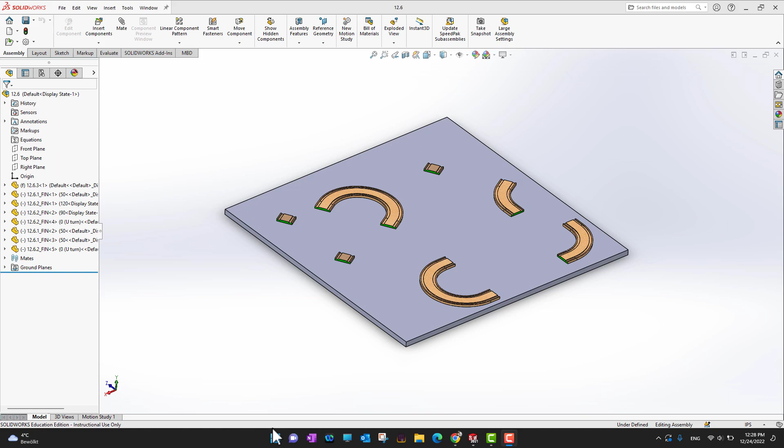But before using the magnetic mates, you need to establish a magnetic connection between the parts which you are using in SolidWorks. We'll cover that in the next video using asset publisher, where we can establish a connection. But in this video we are just going to use the magnetic mate.

Right now, as you can see, I have an assembly. What I can do is hold a component, and when I hold a part or component, you can see there are dozens of pink dots available on different components. These are the magnetic connections or available connections.

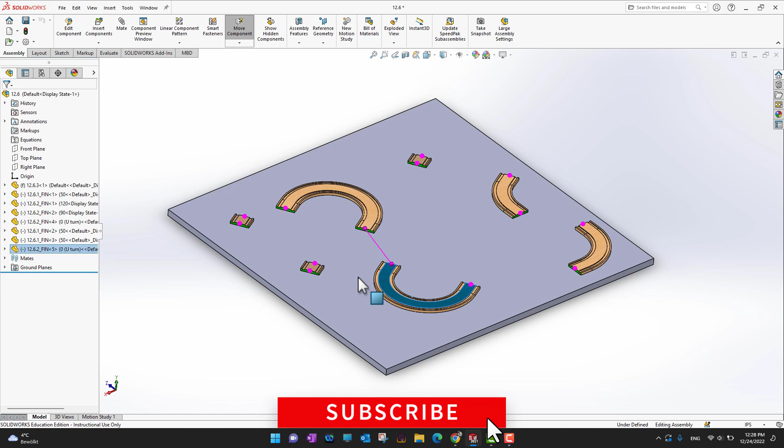When I bring it close to any of these parts, you can see there would be a line established there, which means these dots are ready to connect. If I let go of my drag, it's going to automatically connect to that part, as you can see here.

Or if I just drag this, as you can see there is another option, again it's going to establish a line and they are ready to connect. And what if I drag this and bring it here, and then I want to make a connection here.

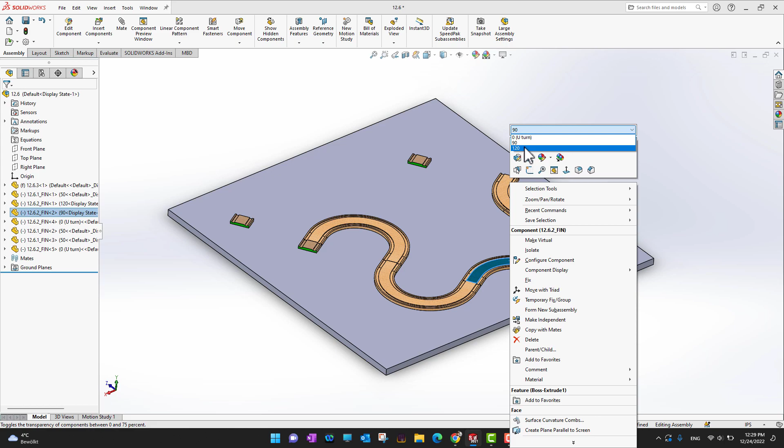There is another thing - if I right click on that, you can see in which configuration I want to connect. So if I want to connect at 90 degrees or 0 degrees, or let's say I want to connect in 120 orientation, I click the green check mark and it's going to change the angle to 120.

So in this way I can just modify my orientation as well. Let's say I want to bring this as well and connect it here, so I can connect it like this.

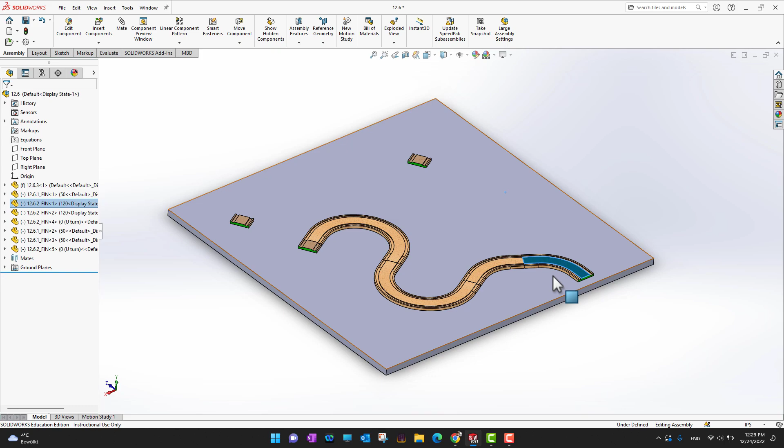But there is another thing - if you don't like any magnetic mate, you can just go into the mates, and suppose this was the mate you don't like, or let's say this one. What you can do is right click on that and delete that magnetic mate, then select yes.

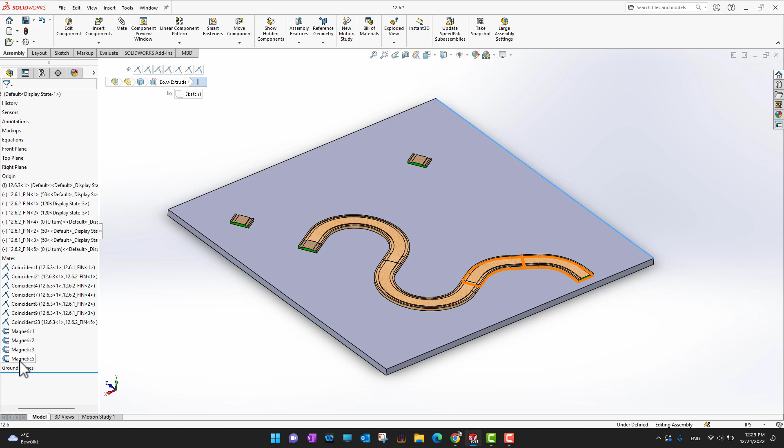In this way it is separated, and then again if you want to connect, you can connect it. It is connected, so I'm going to delete this mate, and right now there is no mate between them. As you can see, I can bring it and drag it wherever I want.

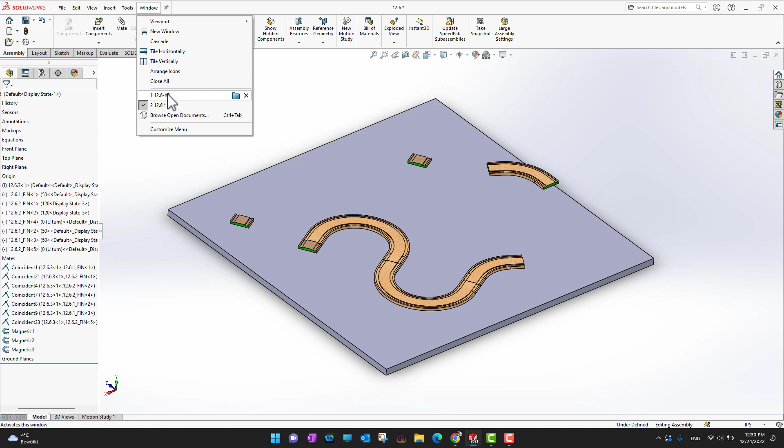So this was my first example of using magnetic mate. Let's go to the second example. I'm going to go into the windows, and I already opened a window here. You can see there is a PVC pipe and a small segment to connect them.

What I can do is create multiple copies by holding the control key on my keyboard. I want to create like this - I want one more copy, so I can create multiple copies in assembly, as you already know, which I explained in previous videos. I want to create a copy of this pipe as well, like this.

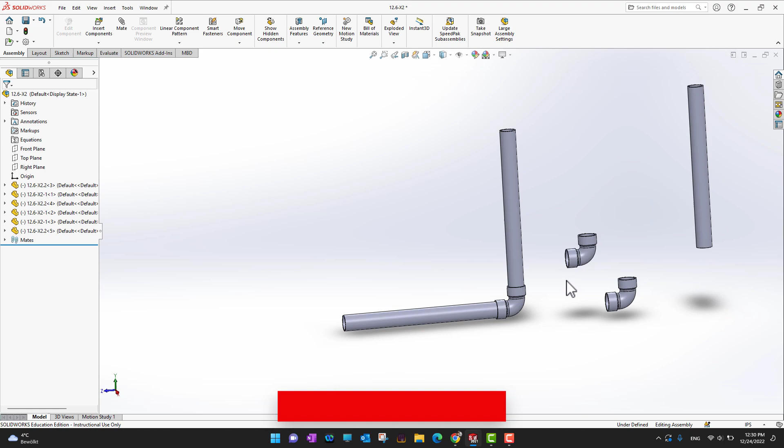Now, because we already established a magnetic connection between these points, when I bring it close to that, you can see these pinkish dots and the pinkish line. If I let go of the drag, it's going to connect it there.

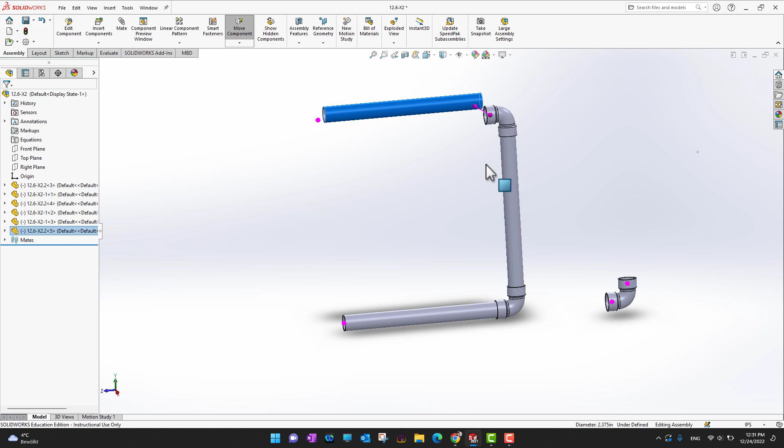Now if I bring this pipe here, again you can see the connection is already established, so there is an option to connect them. I'm just going to let go of my drag, so it's going to connect it there. Again I'm going to bring it to there.

As you can see, there are pink dots, and I can bring it there and establish a connection like this. This is really helpful when you want to create assemblies with multiple copies and connect different mates. It's going to save you a lot of time, and you can create multiple mates very quickly.